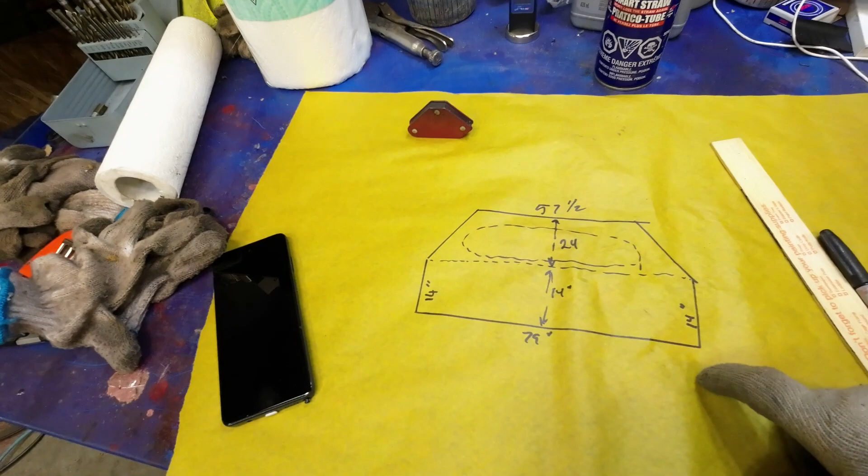So it's 79 across the bottom, and then it goes out another 8.5 inches each on the side there, beyond the side of the truck. I don't want the headache rack going out there.

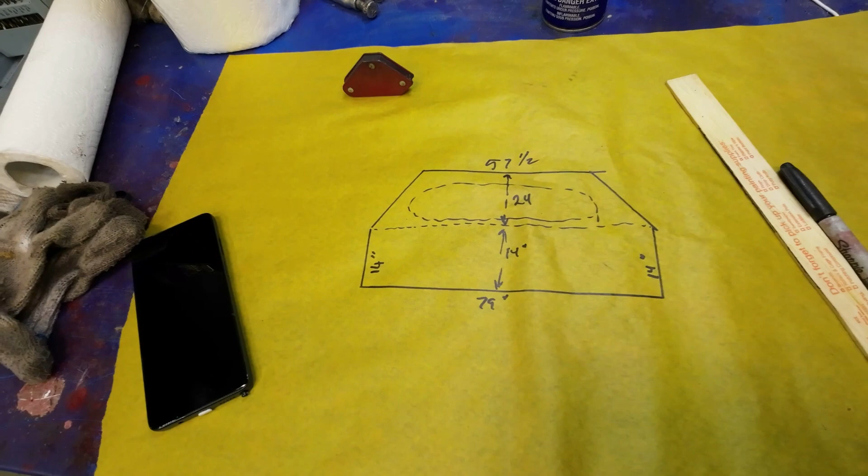Then it's 14 inches to the bottom of the window, and another 24 inches to just above the third signal light up there, like there's a brake light up there, or whatever it is, a cargo light or something. Anyhow, so I'll make the headache rack just above that.

Then we'll put a bar across here, put a couple of bars here, and then we'll put a bar, and a couple of bars in there, just to keep stuff out of the window, eh? Okay, there we go.

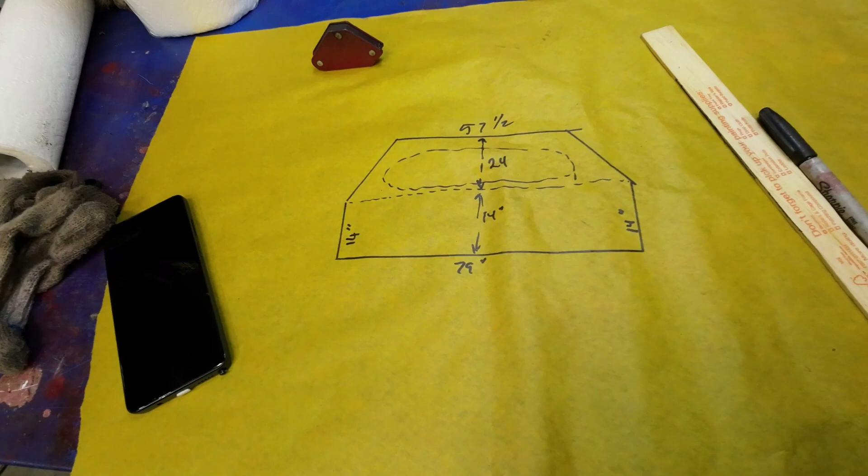Yeah, can you see that marking on the floor? No, can't even see it, right? Yeah, there, I've got black marks on the floor here, see that? That all the way around here. That delineates the thing, the headache rack.

So then I'll put another one across here. I don't have that marked in yet, but that's just later. So now, I need a 48, I just need one of these things cut in half.

Then I'm going to try and cut this angle out of it and just bend it so that it has a bend on the end there, and then weld it. See what I can do about that.

And then this part here, I'll do it with this piece going this way. I'll leave that so it overlaps on top of it and cuts at the right angle, I hope. We'll see. So that's what it looks like on the floor, except their measurements are exact on the floor.

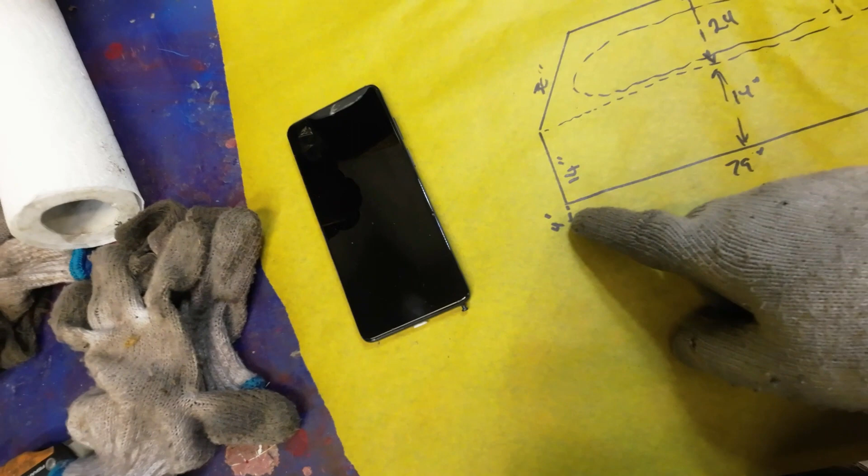And then this, like I've got a 4-inch that'll overlap the frame, weld on there, and then I'll just cut that off, like 3 sides get cut off, and then it's up here for 14, over here for 30, across, up here for 14, over here for 30, and that should make it fit. We'll just see.

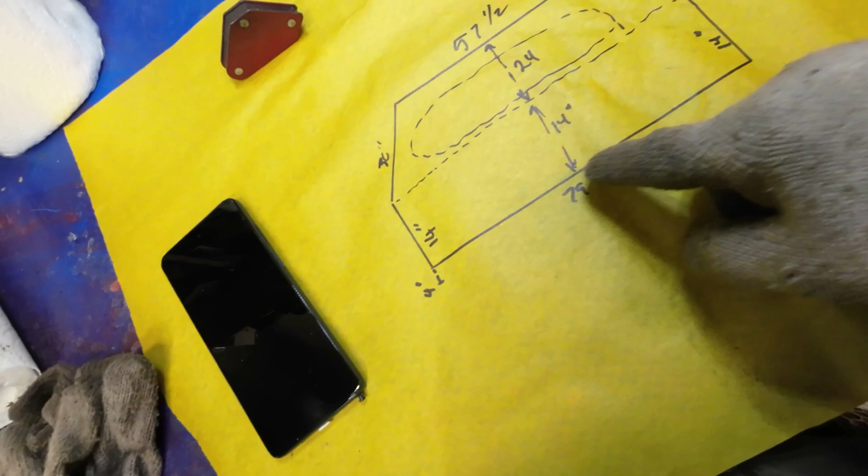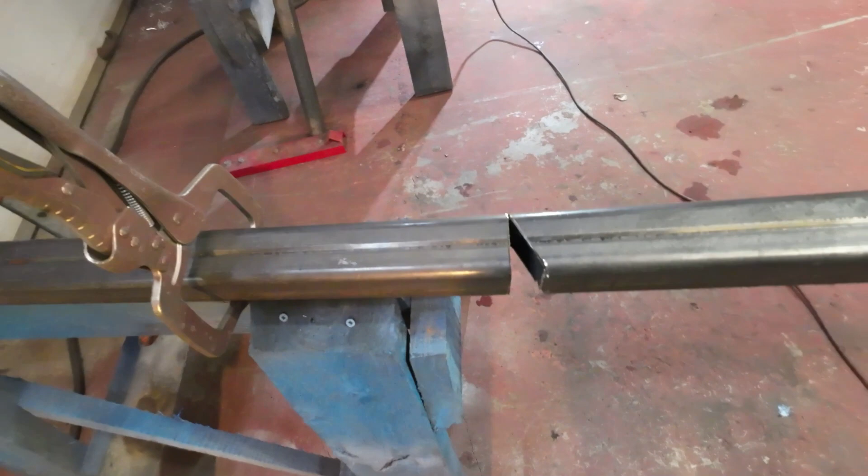Yeah, what did I do? Did it wrong. Oh dear, nothing like being a dummy. Well, I got another chance to make it. I'll just leave that alone for now. I did all that cutting, and it shouldn't be cut like that. How did I do that? Oh well, try it again.

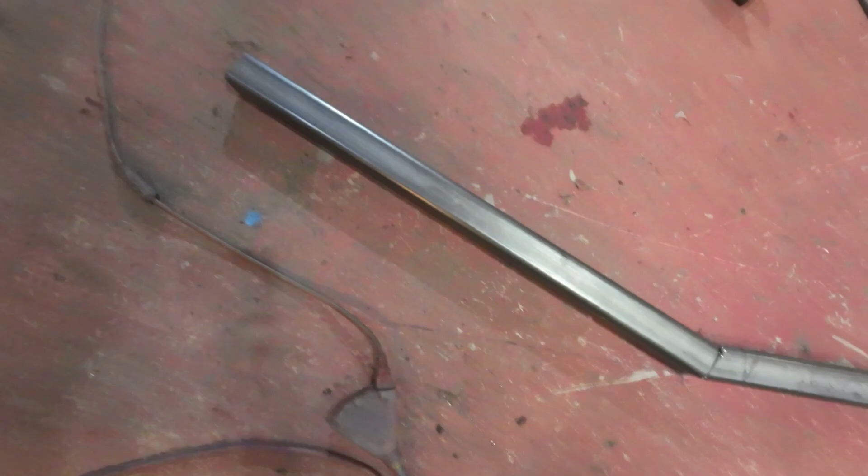Yeah, even though I've got it wrong, the concept works. So I'll use this as a model and I'll carry on. I'll do one over there, and then that metal here won't be wasted because I'll use it for bracing instead.

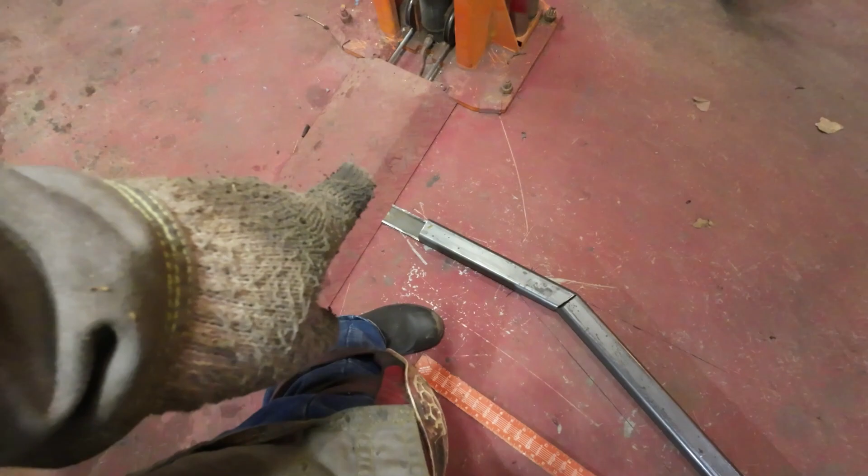Yeah, I kind of redrew my plan so it has that extra 4 inches in there because it was just screwing with my mind. And this other one here, I'm just going to weld that piece back on because there's nothing wrong with that piece of metal.

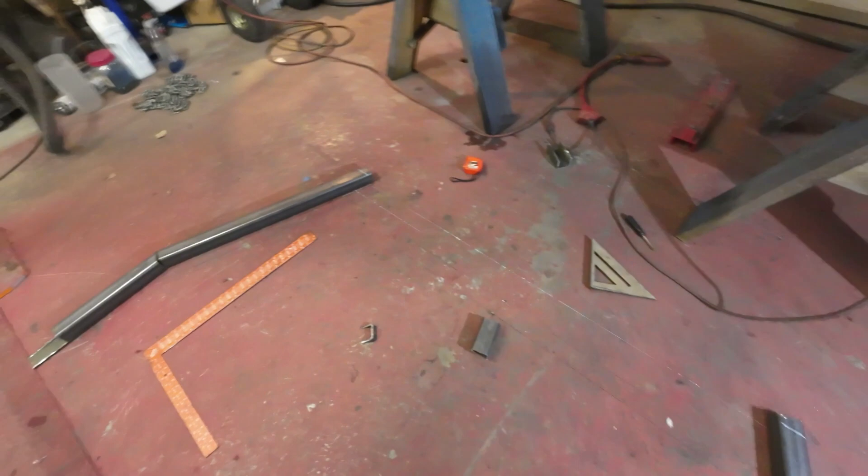And that's the way it'll sit on the rack outside. It'll sit on the rack, and this will overlap down the front on each side of it. So that'll be good. Then I'll cut that, see the white line here? I'll cut that off. But first I'm just going to tack weld each one of these so it holds at that angle and I don't have to worry about it anymore. Yeah, lots of cutting.

I'll just give you the bird's eye view here for a bit. See if I can get this to stay in one place. There we are. So I've got to cut, cutting on the end here, down here.

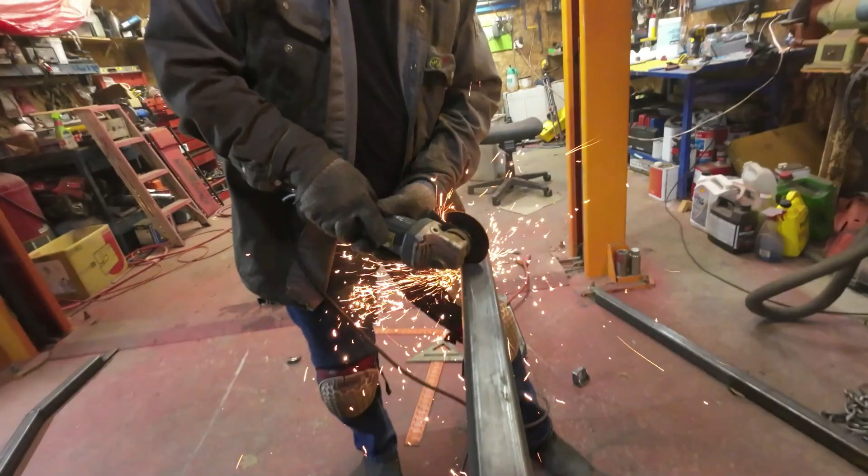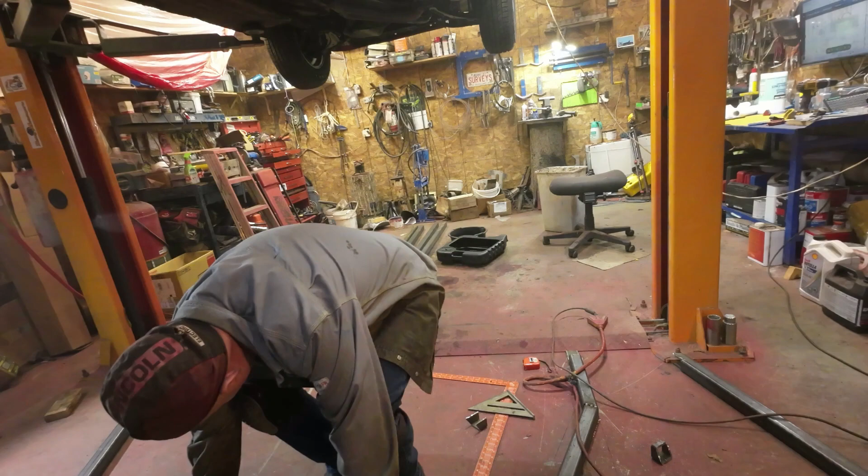Then I'll show you where it fits. Maybe, where it potentially fits. Down here on the floor. So it fits. Let me back off here a bit.

So there's kind of the outline of it all, hey? So this piece here fits in just like that. And it goes in over here like that.

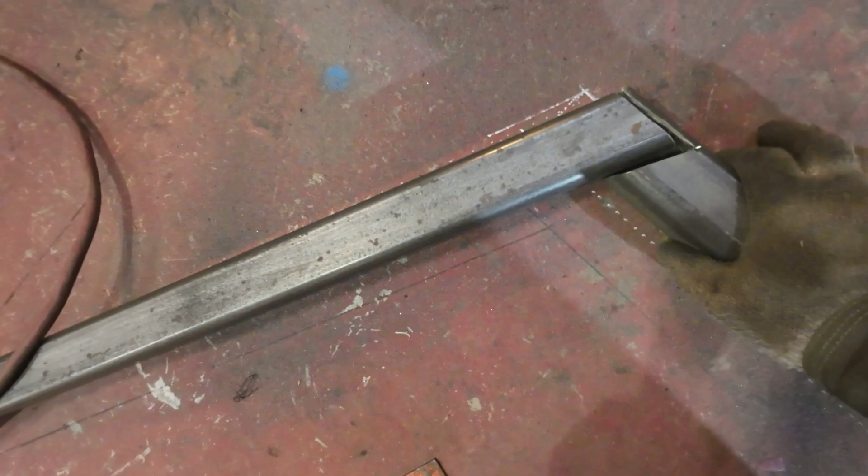Didn't do a great job on the cut there, but I guess I can fill that in with weld. See how it comes together here. So that should be there. That's a nice cut there.

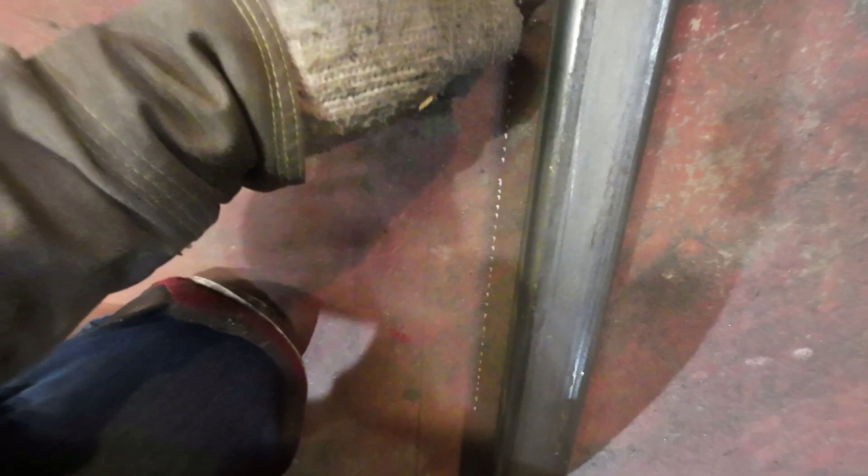This one here, the right distance out, but I have to cut a bit right there. I've got that not cut far enough. I cut on an angle there. It's got to go down straighter. Okay, I'll straighten that out and then fit it.

Yeah, there, I'm pretty happy with that fit now. It's within 1/8 of an inch, which is more than good enough for us guys. So I'll just tack it into place, and that'll be pretty well it for today, I think.

I'll just check the time here. Hang on a minute, I'll check the time. What time is it? Yeah, it's just 5:05. I imagine I can get some more welded on here, and then start putting the cross brace pieces in, and then we can mount it tomorrow sometime.

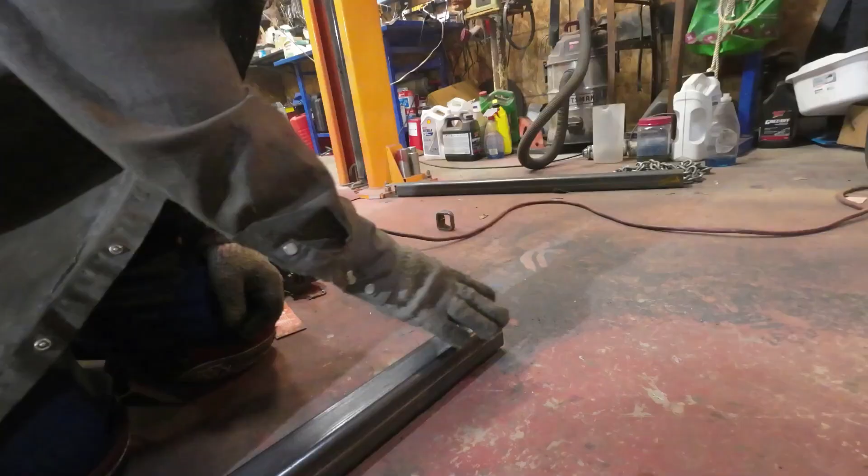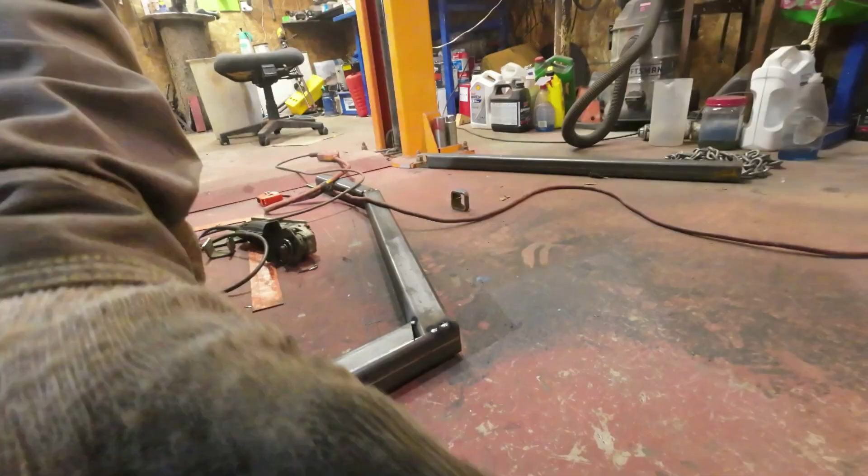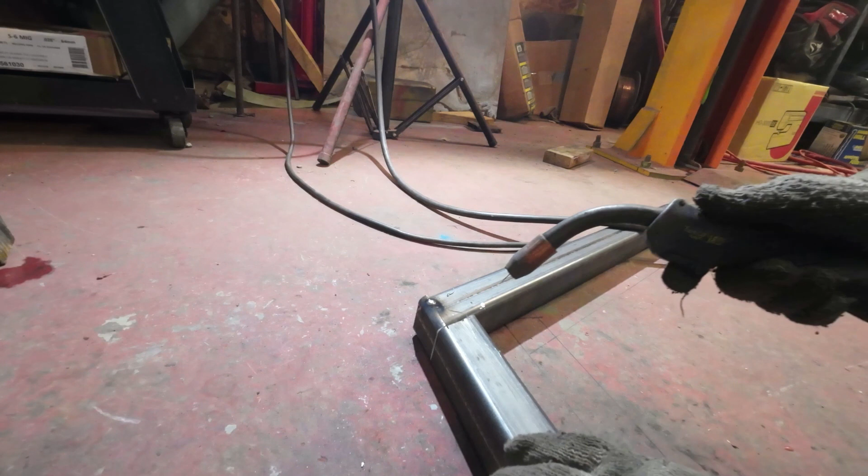Now I can sort of lift it up on there, and I'll lift it up on the workbench there, and then I'll weld it up. Okay.

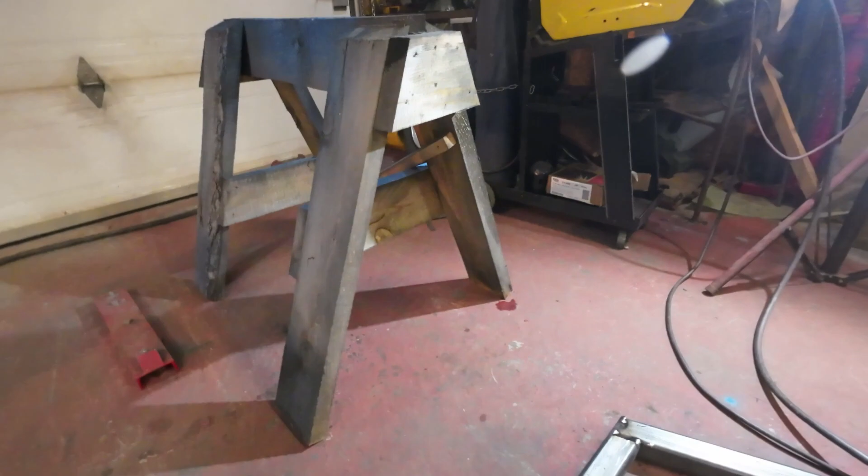Yeah, so here's a bit of welding for you. See how this works out.

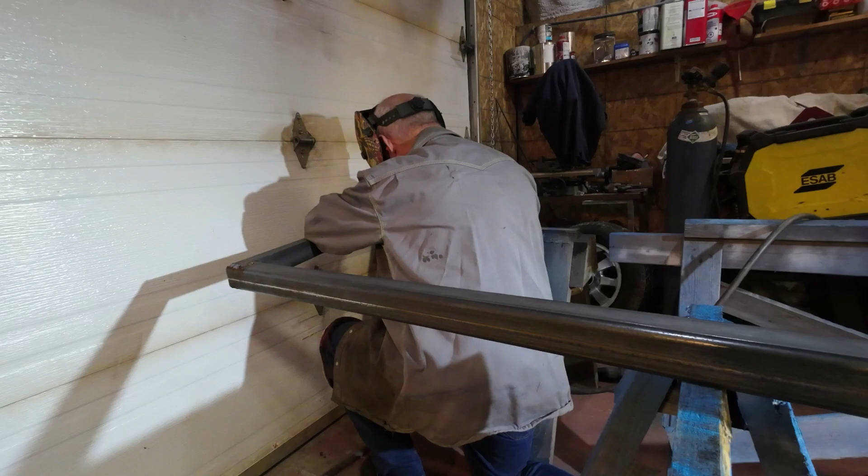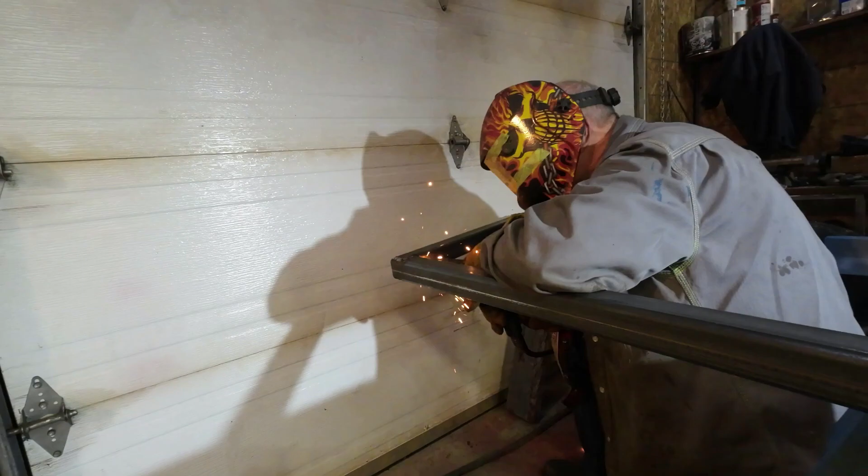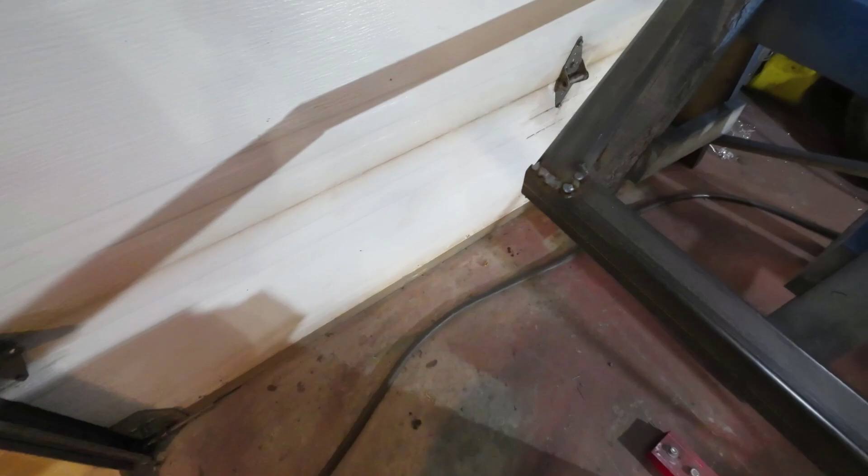Yeah, now some of those welds are pretty nice. Other ones aren't as. Well, actually this one's pretty nice. That's alright, that's okay. How'd I do over on the other side here, on the dark side? Oh, that's alright. I can live with that one. And I can live with those.

Okay, so now I'll flip it over, I hope, without breaking myself. Yeah, so here's the flip side, I hope. Yeah. That looks alright, that's okay.

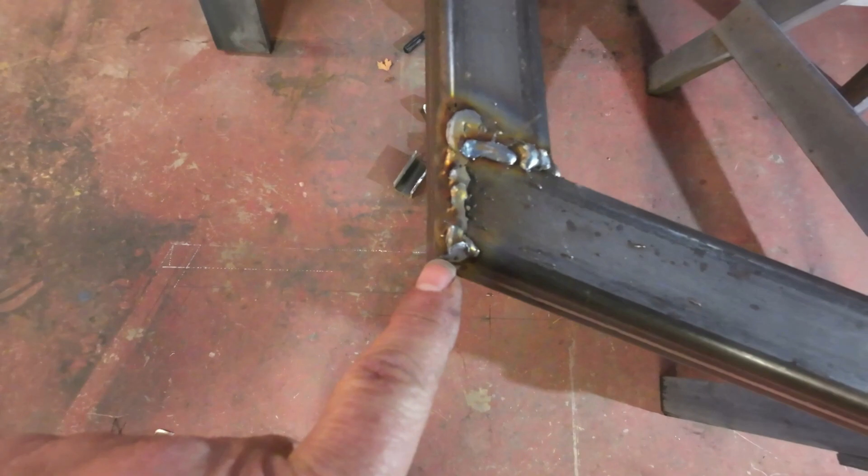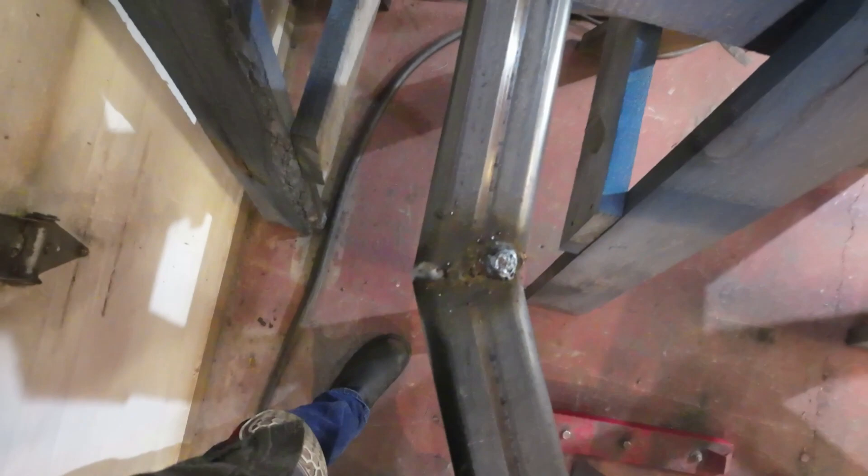That one there needs some grinding. No weld there. That weld there is nice. That's all pretty nice. This one here is ugly, I don't know why, there's some impurity or something got into it there. And then I welded on this piece at the end here, so it's like a piece of the pie again. So now that's enough for today.

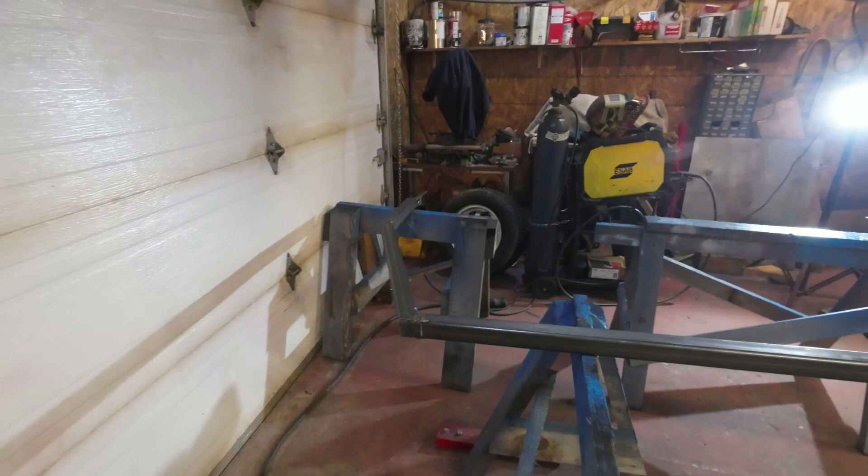I'll put this stuff down flat, and then I'll let the car back down, and that'll give the welder a chance to finish making all that noise. So pretty good today.

That's tomorrow is supposed to be warm, so I might be able to get it on to weld it on there and then paint it up, and that could be another chunk of that truck done.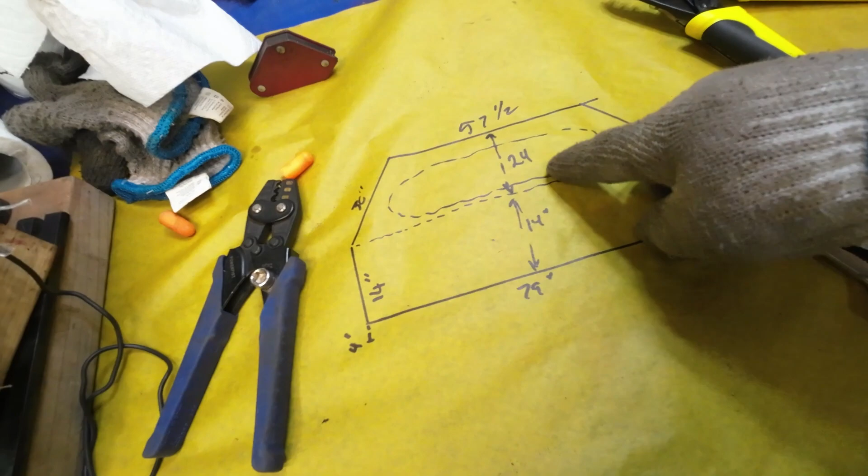Hey, okay, yeah, here's my major plan, right? So I'm back on the welding of the headache rack. I've got this part done. That part there is on the truck. So I'm going to put a piece across here. Then I'll put some uprights, likely 3 of them here, and then maybe 2 of them here to keep stuff out of the back window. So that'll be that, and then that should complete it, I hope.

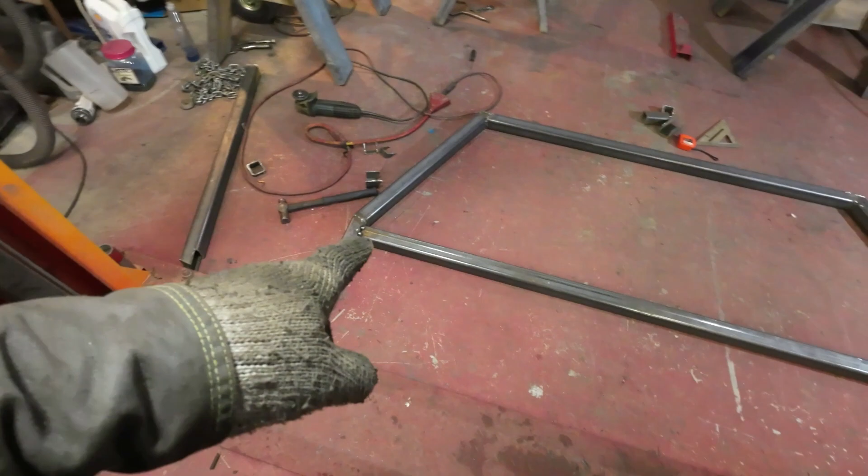We'll see. Yeah, okay, so there's a cross piece tacked on. I've only got it tacked in 2 places. Now I'll make some pieces. I think I'll make one here, and then sort of from here to here, and then sort of from here to here.

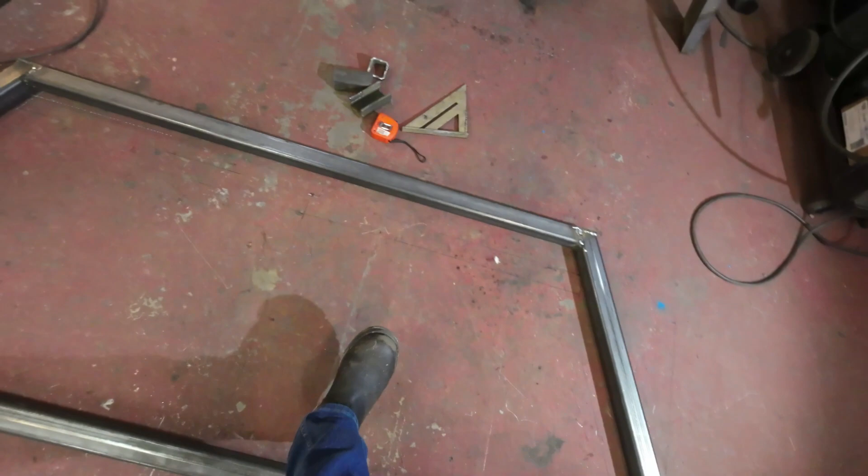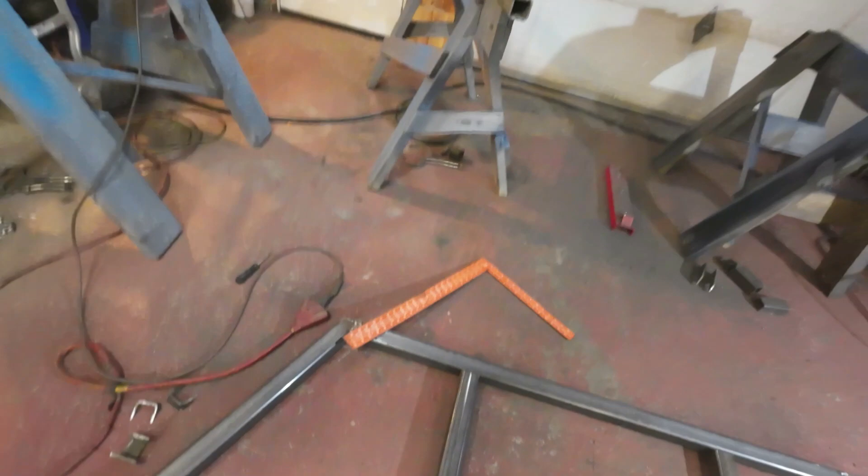I'll think about that. I'll put the bottom ones in first, and then think about the top ones. Yeah, there, that's where it's going to get to, I think. I was thinking about putting a couple of pieces across here, but I don't think it needs it, and I kind of like the look of it the way it is right there. It looks pretty heavy duty.

So these other pieces of steel that I've left over, I'll use for doing the back of the truck, around the back bumper business. See what I can do about hanging something in there. Now, I want to get this welded together, and then maybe get a coat of paint on it, and then weld it to the truck somehow or other. We'll see about that.

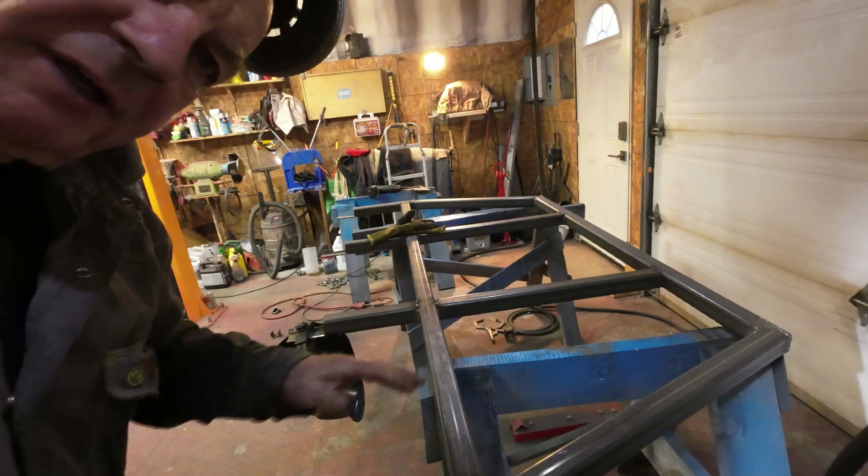Yeah, there we go, just about set to... oh, they're still warm. So I'm gonna just weld up all this. I've got everything welded around on the back sides, so I'm gonna weld up this side here. You might be interested in watching that.

Yeah, there, excuse me, that's all welded up. That one there is a bit ugly. Must be some stuff in the metal right there, I don't know. This one here is nice. That one there is nice. This one here is nice. I'm cooking my clothes, right? That one there is acceptable. We're all good everywhere, I think.

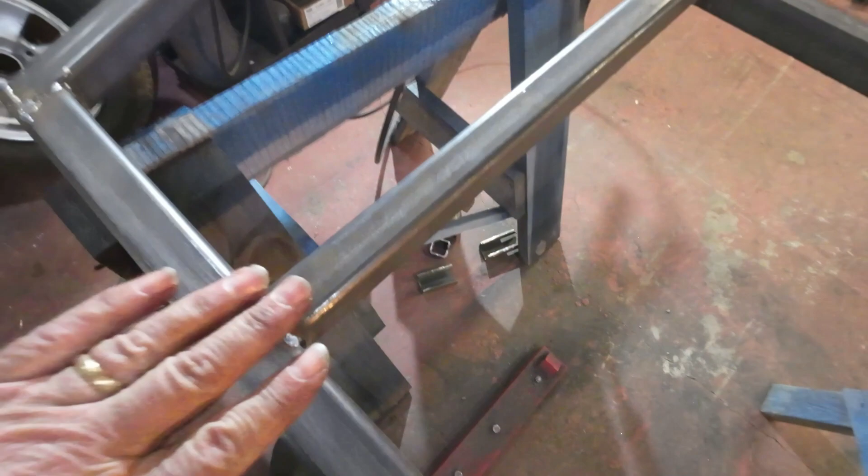I don't know if you noticed, but I'd forgotten to weld that side from when I was on the other side. But that's all, looks pretty well the same on the other side, so that's good.

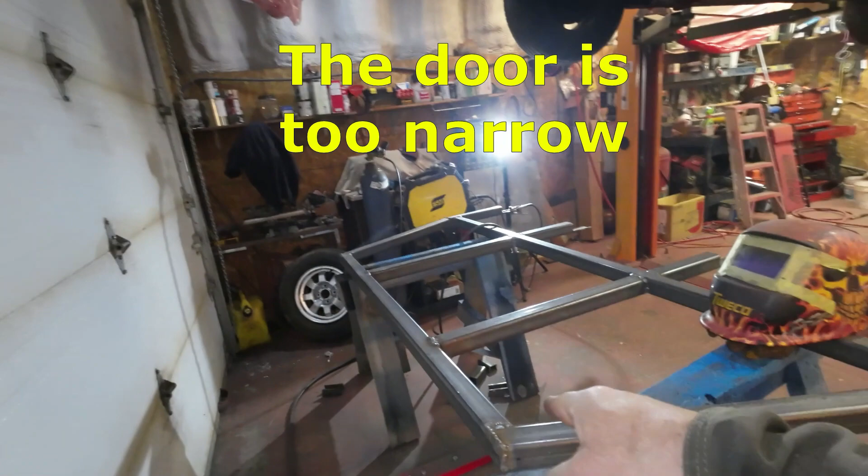Now, it's a matter of getting it onto the rack of the truck. So I'm going to take the tractor, lift off that thing, turn it around this way, come in, and just bring it in the door. I think the door's wide enough to get it in. And I'll just lay it here, just inside the door. Then I'll put this thing up on it, I hope, and see where we go from there.

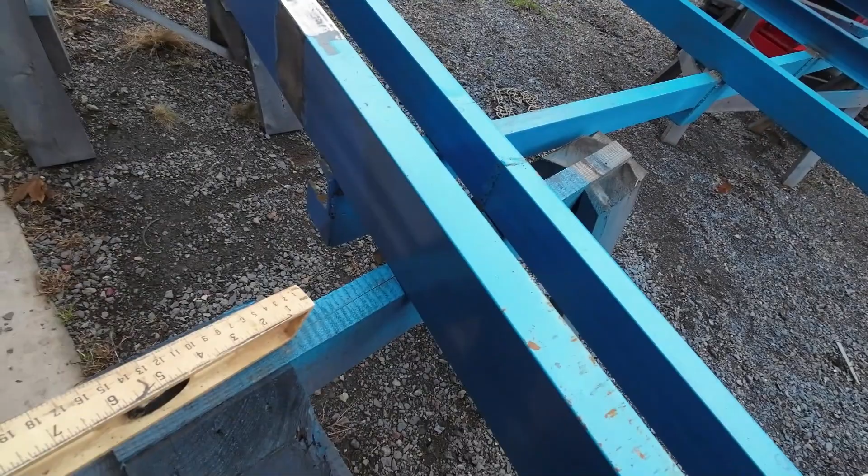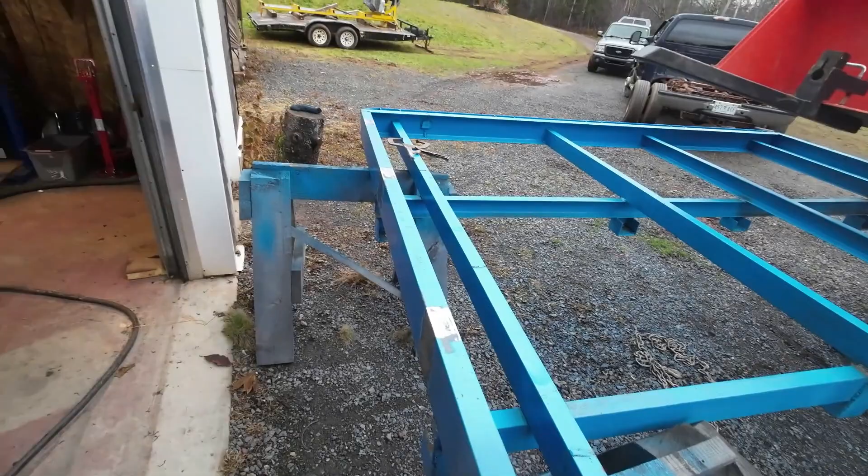Yeah, so here now, we got this moved over here, and this is all level that way. And so now the tractor's holding it on the hydraulics there, sitting on these things here. So we're going to take very famous Gus's here, and we're going to lift that thing up, put it on here, and then tack it into place and weld it into place. We'll just see how it goes, and put the level on it going up and down so that it's right. Now, where can I put you? You can sit right here and watch all the fun, right?

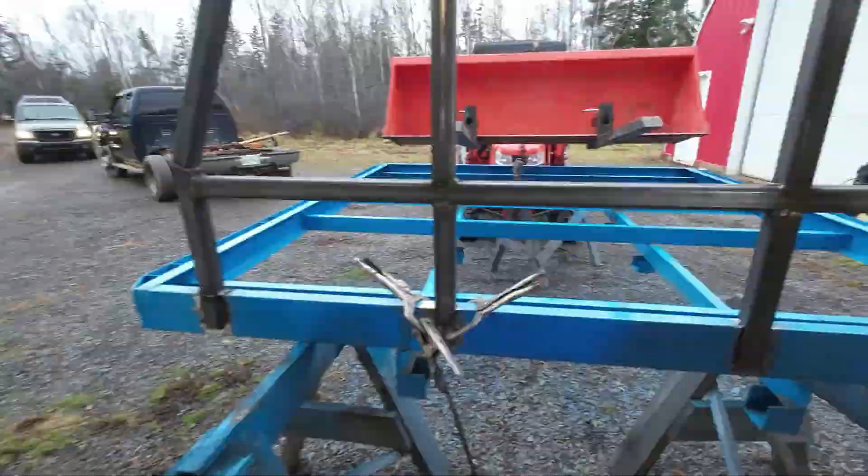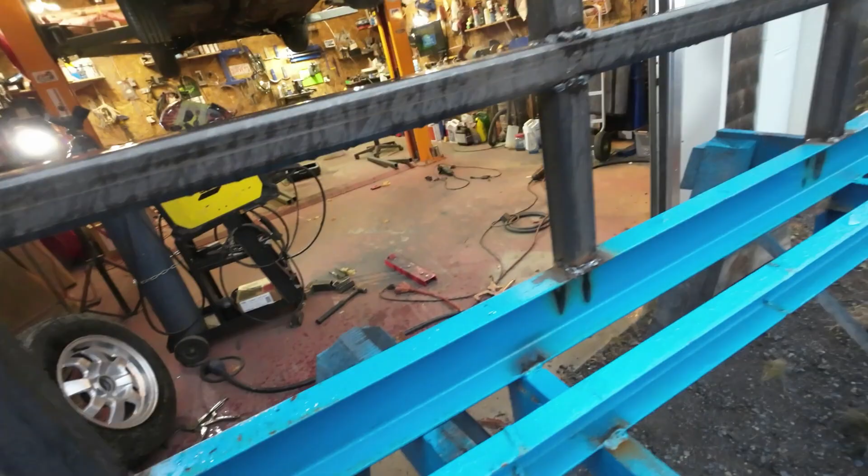Yeah, there, I got it welded on, but between all the wind and the rain, it's pretty ugly welds. Started raining on me, and it's still raining, but everything's welded up. So, and it's solid and it's level and everything like that.

So I got to just drop the tractor off down here. There we go, that's good for now. And I'll close this up, and it can blow all at once. Oh, got that the wrong side of the door. Oh, you don't need to be watching this, but you are anyhow, hey? Oh well, there you go. See? So, got the tractor tucked in.

Now I'll just, yeah, so I guess it's pretty good penetration there. Burnt the paint off, that's good enough. Must be penetrated all right. So, now that looks all right. And I'll get it over.

So now the next thing is somehow to get it painted. If I get another warm day, I'll paint it. But the wind, the rain, can't paint it today. I was hoping to get done before the rain came, but then Gus was here, and Gus wants me to go on a bit of an adventure with him to pick up something. So that's the rest of the day used up now because it's 3:39. Yep, and that'll be it for that today. I'll close this off. I'll see if I can get it back onto the truck so it looks, see what it looks like on the truck, and then we'll close this one off after that.

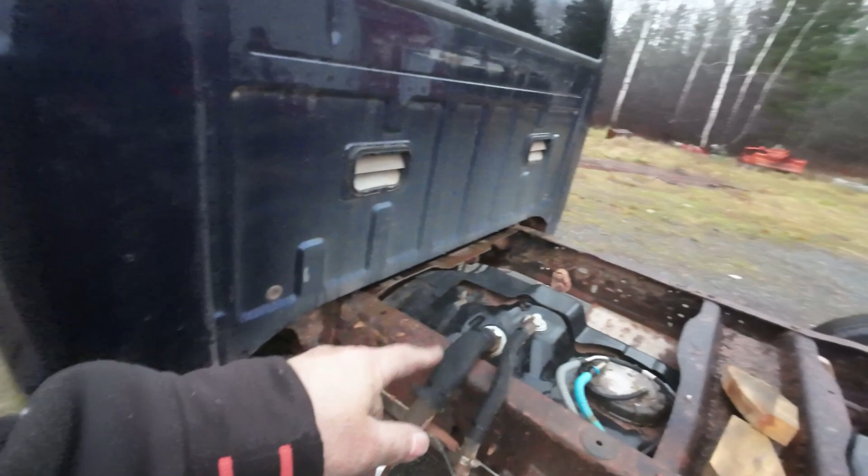Anyhow, that's got to go on here, but that's enough for today. I still have to think about how to make the fuel delivery system for it. That's a quandary still, I'm still thinking about it. I'm thinking I might get a piece of metal tube, put it in there, and bring it out right to about here. That might work, but we'll just see.

Anyway, that's enough for today. A stormy day, just when I wanted to get finished welding, it all happens at once. But actually it looks pretty good, that thing. Okay.

So what I'll do today, it's going to be about another week before we get another warm day here. I want to put this rack back onto the back of the truck so I can figure out how much comes down to make a guard at the back for the bumper business. Anyhow, you want to watch? See what I can do here.

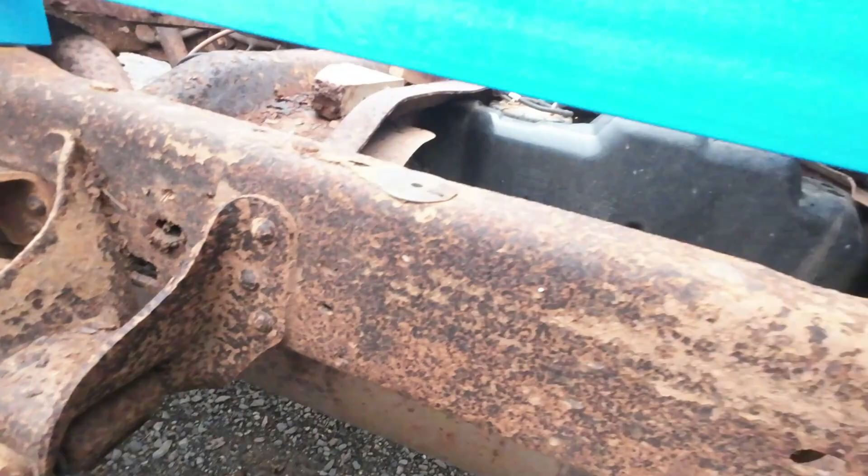In here, yeah, the hole's pretty close. Got to go over just a bit this way, and a bit back. Right about there is where it should be. That's about there, I think that's right now. Just check.

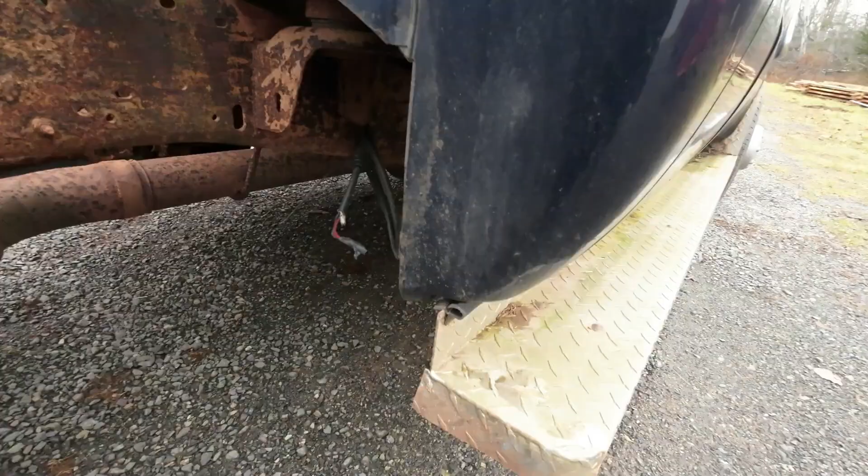Check from out here, right? So from this body line here, it just sort of goes right there, right? I'll just check on the other side, see how close it is. Yeah, it's about the same. This body line here, about right there. Yeah, so that's pretty awful close.

I won't be too much of a stickler on that one now. Yeah, it looks right now. You can see when you walk over this way, it just sort of covers in. So that'll hopefully be good to keep that stuff out of the, like there are big crates that go on here, so that should keep the crates out of the back window all right. If we need to, we'll put a couple of crossbars across there. But I didn't want to block off the view out of the back window completely with that thing.

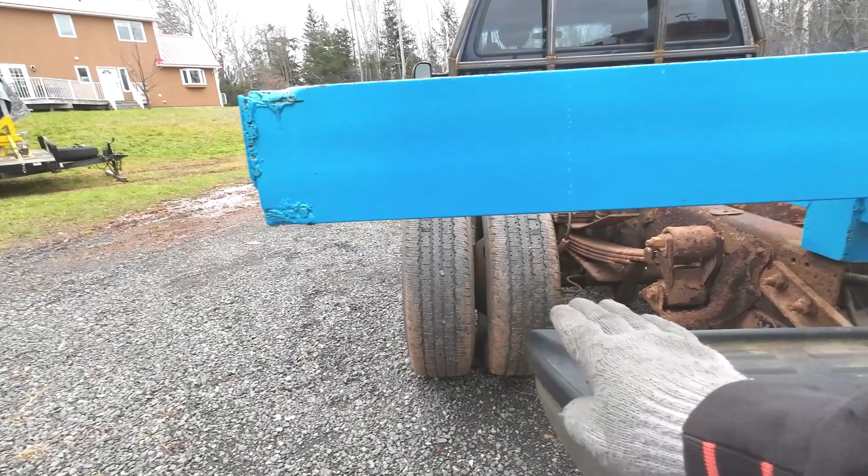And now I'm gonna build a little thing that'll come down like just like here and across, maybe hit the bottom of that, go back up. Then I can put some plate metal into that, and that will make it a place to mount some lights on it. Just see how that works out.

Okay, that's all for today, and that's all for this video here. That'll have to wait till it gets warm enough to paint that thing, and I'll pull it off and paint it. At the same time, hopefully this part here will be done, and I'll pull that and paint that. So I'll just back the truck up to the door there and weld this stuff on, and I won't bolt that down until I get that all done. Good, and get it painted. So there you go, see you later.